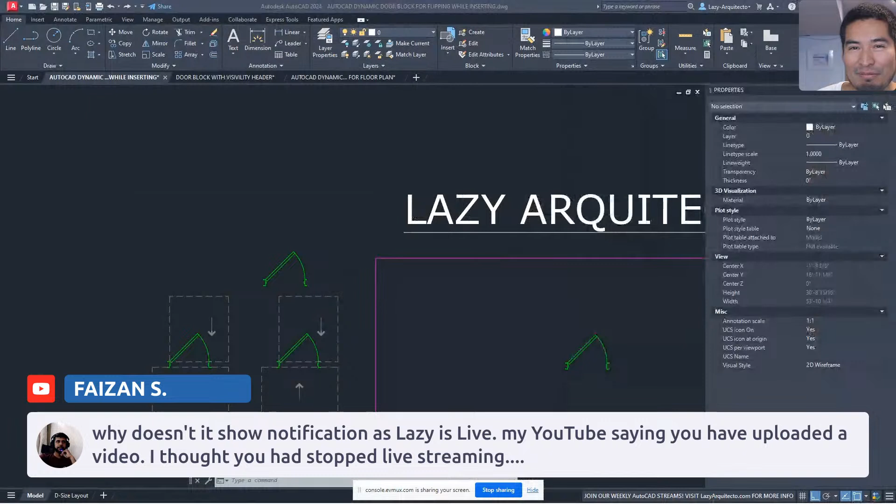This is in Spanish, that's funny. For people who don't know, Spanish is my first language, because I'm originally from Peru in South America. So yeah, so let's see.

All right, so I'm here with another account again, just to show you guys. I'm gonna unsubscribe, let's see. I'm subscribed already, I'm gonna unsubscribe just to show you. All right, so if you guys are new to the live streams, you can subscribe to the channel right here. What happens is, if you only do that, I can see that I'm subscribed now, but that doesn't mean YouTube is going to notify you when there is new content. There's an extra step, and the extra step is to hit this triangle over here, and you can click all. Right now you can see it says personalized. So if I click all, then this is where you will be 100% sure that you will get notified when we release a new video, when we do a new live stream, and so on. All right, so hopefully that helped you, Faizan, and also some of you guys who are new and are not receiving notifications.

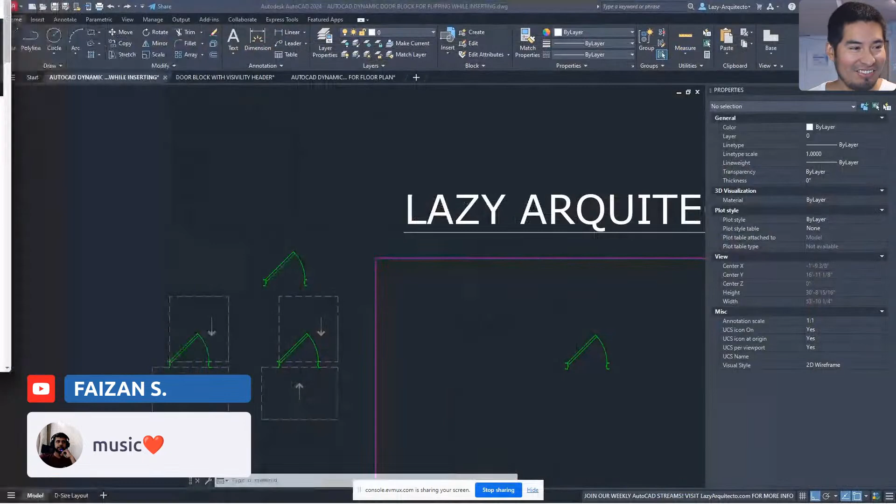So let's see over here, we have 'music heart.' Oh, so you're referring to the music, Faizan. Yeah, so there are many people that love the music, that's great, I like the music too. It's kind of a music from my country, Peru, so those beeps and sounds are from Peru.

Let's see, Pakistan, wow that's far away from here my friend. That's great that there are people joining from all over the world. I know Rachel is from England, Faizan now is Pakistan, I'm in the US, and I know other folks from other countries too. Oh sorry, Rachel said, 'What? Scotland, if you don't mind.' Sorry, I was getting confused with Martin. Martin is also on the chat, right? Martin, you're from England, right? Just let us know in the comments, confirm that for us. So we have England, Scotland, Pakistan, I know we have folks from India, from all over the world. Tuan says Vietnam, whoa that's crazy, that's great Tuan that you're watching us from Vietnam. What time is it over there?

Martin says yes, England, London area. Wow, that's great, Martin.

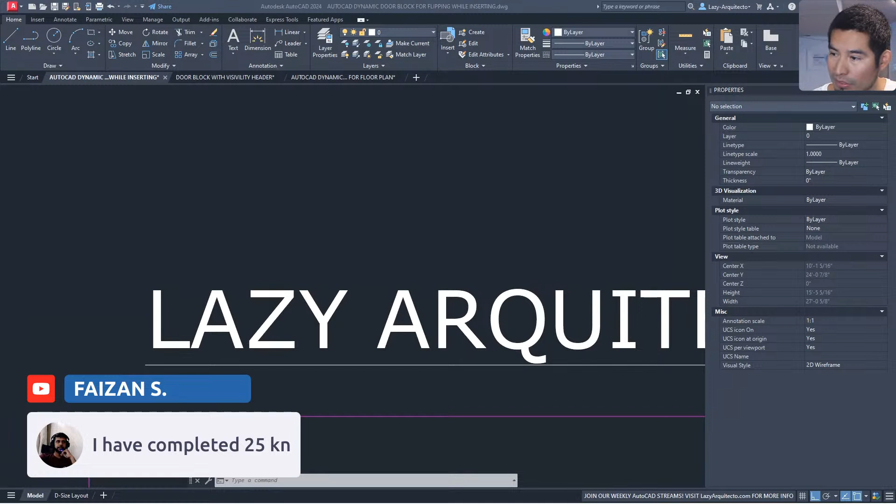Faizan says, I have completed 25 kn. What's that? What do you mean kn, Faizan? I have completed orders by learning from you. Oh, I have completed 25 online orders by learning from your videos. Wow Faizan, that's great. For people who don't know, our friend Faizan, I believe, is providing services online, and he says he's got 25 online orders already.

That's awesome Faizan, that this channel is kind of helping you, maybe motivating you to do all kinds of stuff. I know people already wrote me or emailed me saying they got their AutoCAD certification thanks to the channel. I also know other folks who got a job and said thank you, I learned so much from your channel, I got the job. That's awesome guys, I like to hear those stories always.

Rachel says, nice one Faizan. Thanks, you are helping a lot. I'm glad Faizan. I think you are focusing, from what you told me your story, just to put into context for folks live with us right now, I think you're focusing on dynamic blocks for your services online. Faizan says that's great, how you get set up.

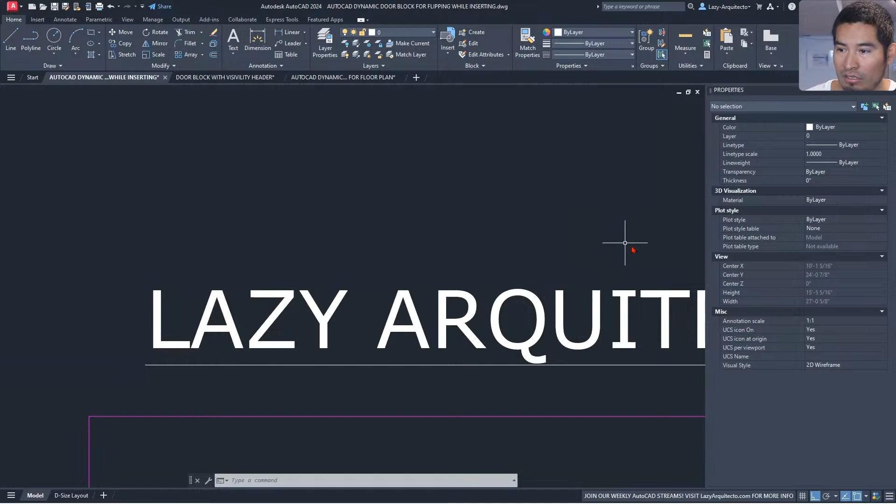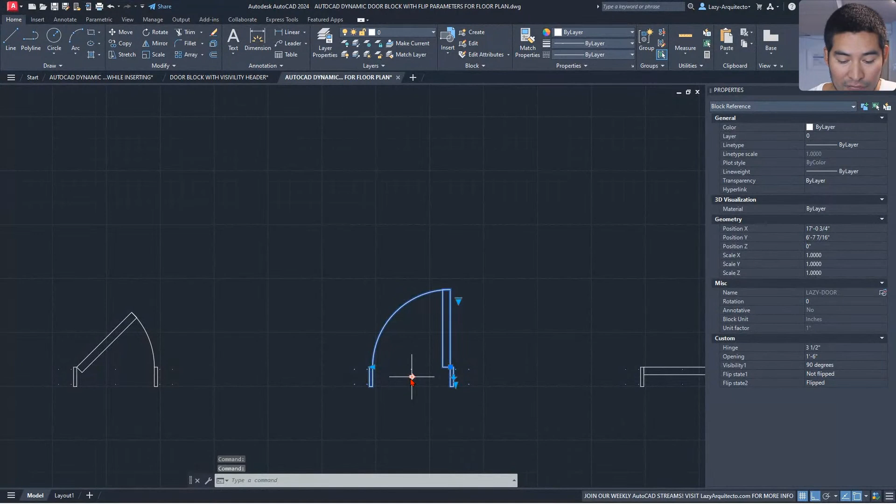Okay, so far we have created many door dynamic blocks in our channel, like this one over here that can flip like so, and can also stretch and have many visibilities. We also have created this other dynamic block that has a wipeout and can quickly change to a door header visibility to quickly generate ceiling plans, instead of trying to draw our headers one by one. We also have created this other dynamic block that will help us insert our block while flipping it on the fly. So we have created so many dynamic blocks for doors.

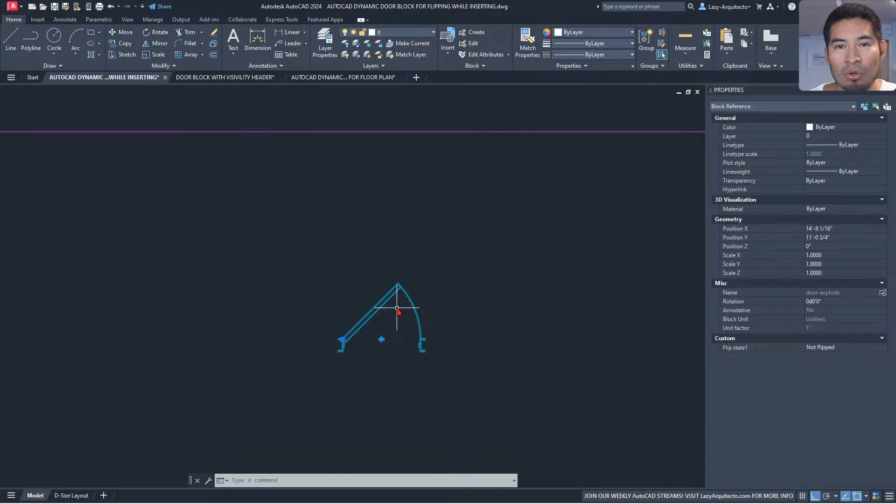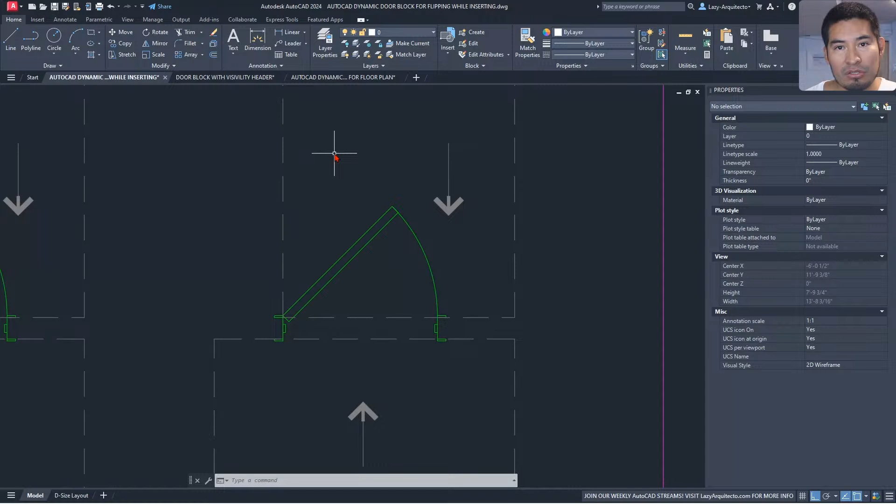However, today we're gonna improve this door dynamic block in a way that we're gonna add a clearance dynamic function. Most of the time when we work in the profession, we have to create handicap clearances based on the code of the city or whatever. So we're gonna do that today. Let's see how we're gonna implement that technique. We have the same door right there, but we're gonna implement this new technique.

So let me clean some of these things a little bit because I don't want you to get confused. These are just polylines with an arrow, nothing fancy there, but I'm gonna simply copy this right here and simply erase the rest. All right, so I don't want you to get confused.

We have some comments on the chat. Let's see.

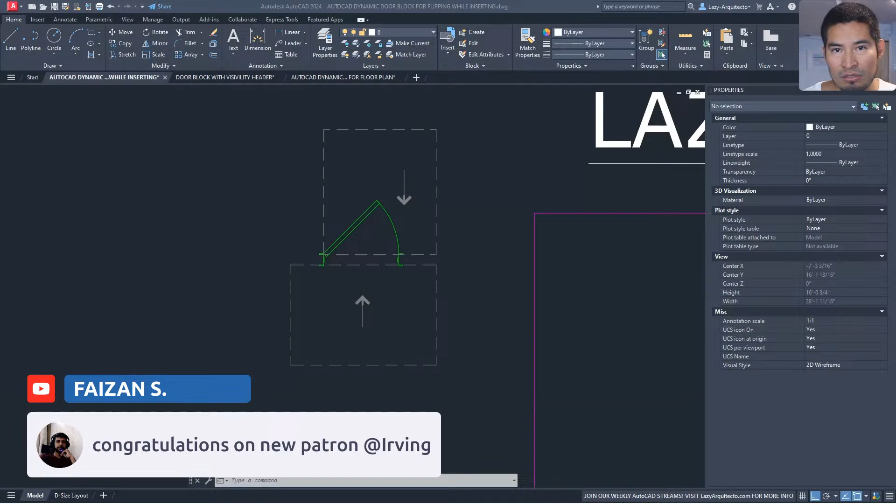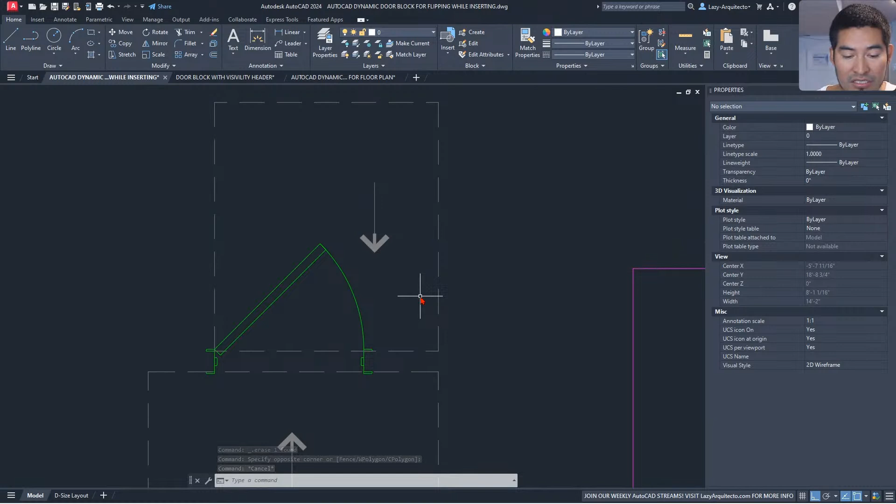Okay, guys, so let's see how we're gonna be able to do this. Hopefully we can do this together. So again, nothing fancy right here. We have simply a polyline with an arrow, and let's see how we can implement this dynamic clearance to our dynamic door. So the way I'm gonna do it is I'm gonna first select our arrows right here, or our geometry,

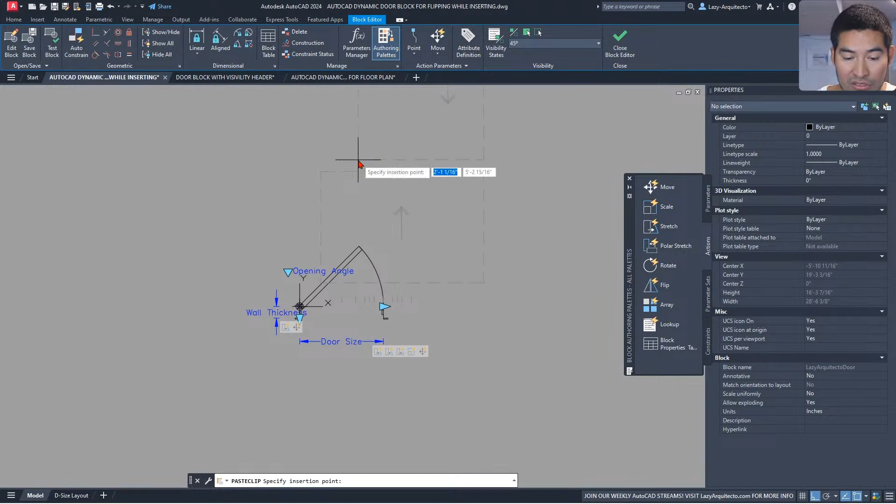and I'm gonna simply use Control Shift X on my keyboard. That's a shortcut to cut base, right? And I'm gonna cut it from my base point right here. So I'm gonna click, and then I can go to the block editor by right clicking on it. And now I'm inside the block editor environment. I'm gonna simply use the Control V shortcut and place it exactly on the base point, like so.

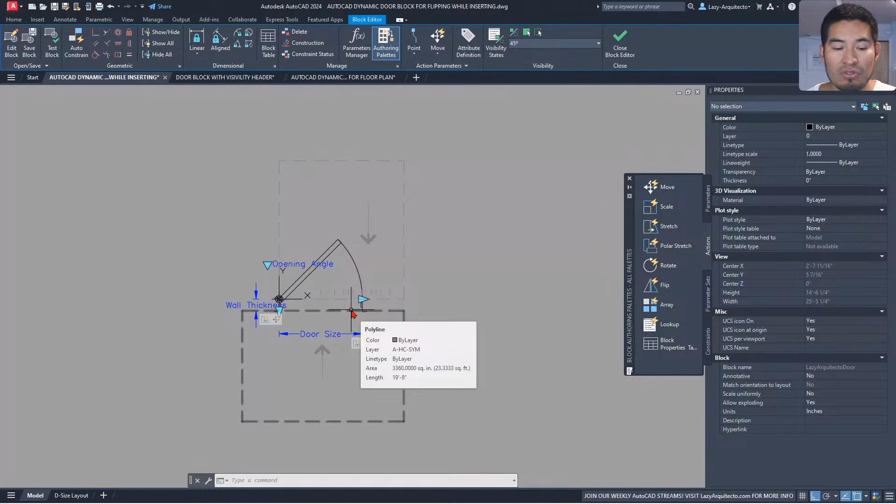Again, all of these different dynamic doors, we already created them in the channel, right? So we don't have to waste time again showing you how to create these doors. But we want to improve this. We want to keep making our lives easier, guys. And let's see how we can do this.

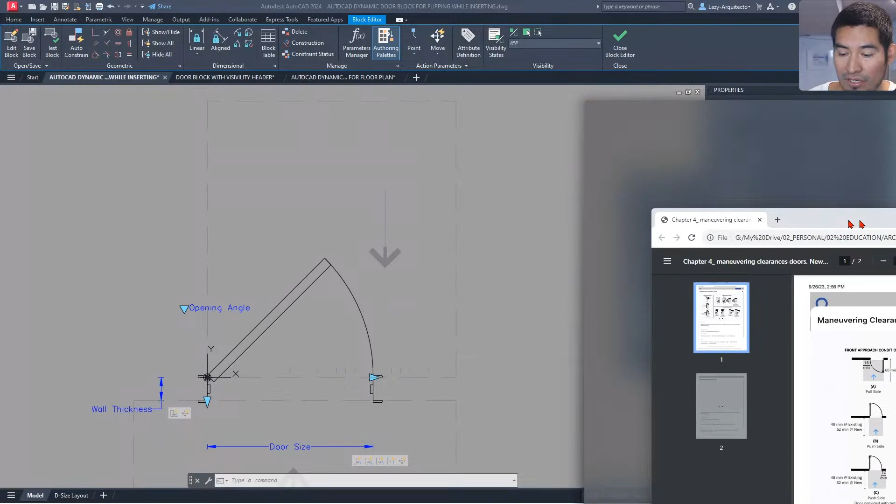So in order to be able to generate our clearances with the right dimensions, I already got a PDF right here that I'm going to show you. It's basically some dimensions for our clearances. People who work in architecture might already be familiar with this, but if you don't work in the architecture field, that's not a problem. This technique can be implemented for many different purposes.

So you might be an electrician. If you learn this technique, it's gonna save you so much time. You might be a civil engineer. Doesn't matter, as long as you learn the concept of this technique with dynamic blocks, you're gonna be able to implement it in whatever block that you have. But for this example, I'm gonna use accessible clearances for doors, because I'm in the architecture field.

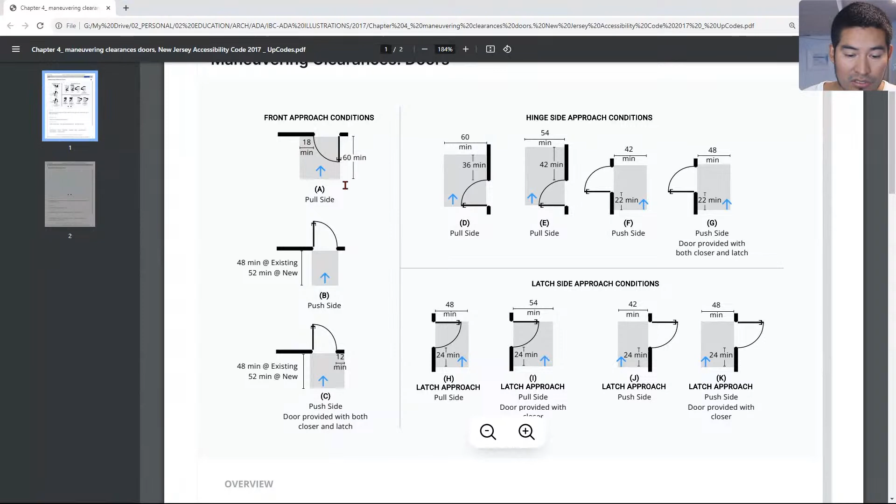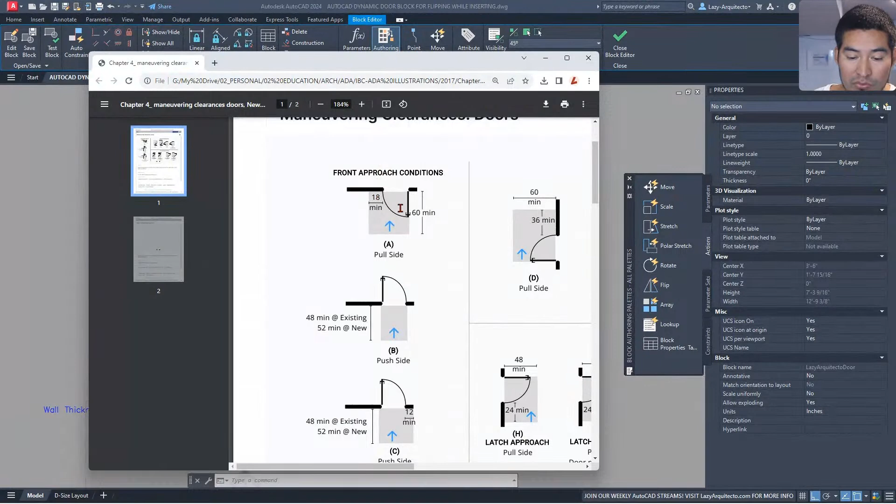Okay, so this chart is gonna help us for the dimensions. Let me put it on the side, and let's keep moving. I'm gonna focus on this top area first. What we have right here is the front approach condition, and that's 60 inches on this side and 18 inches on the pull side over here. So just remember those two numbers because that's what we're gonna use.

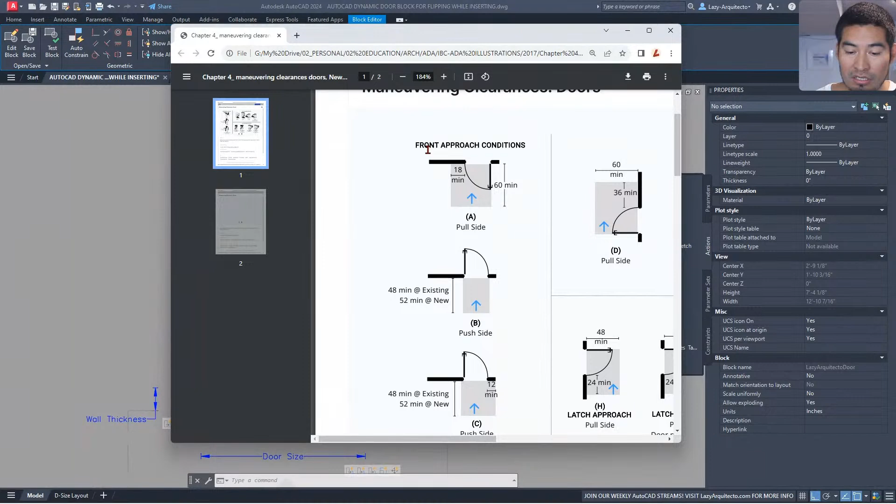We already have 60, but I'm just gonna make sure really quick. So here we go, 60 inches or 5 feet, and on this other side we should have 18 inches, and that's what we have. So far we're good. The arrow is very important also. That's the direction of how people are accessing this door. Let's double check. It's going towards the front approach, so our arrow is pointing to our door.

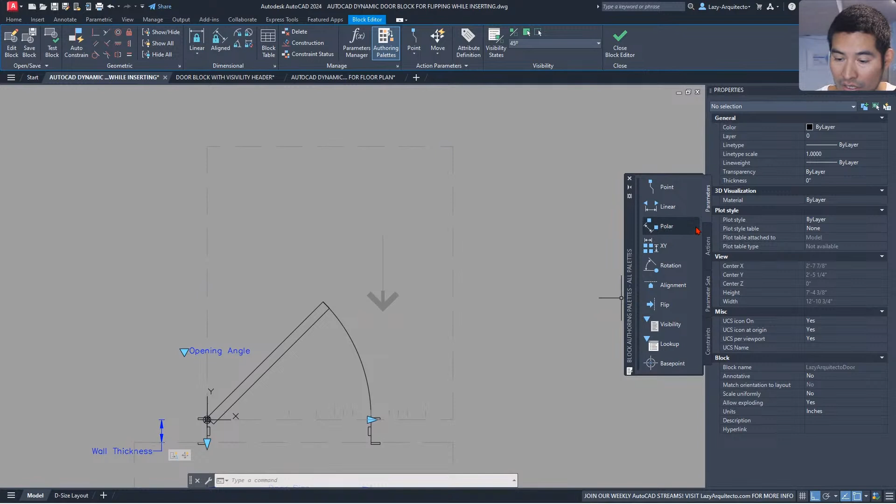Great. So one of the first steps is to start adding some parameters and actions to make this block more helpful. The first that I'm going to add is the linear parameter. I'm going to add it following the instructions on the command line, click right here on this base point, oops, right there. My second point would be right about here, and finally like so.

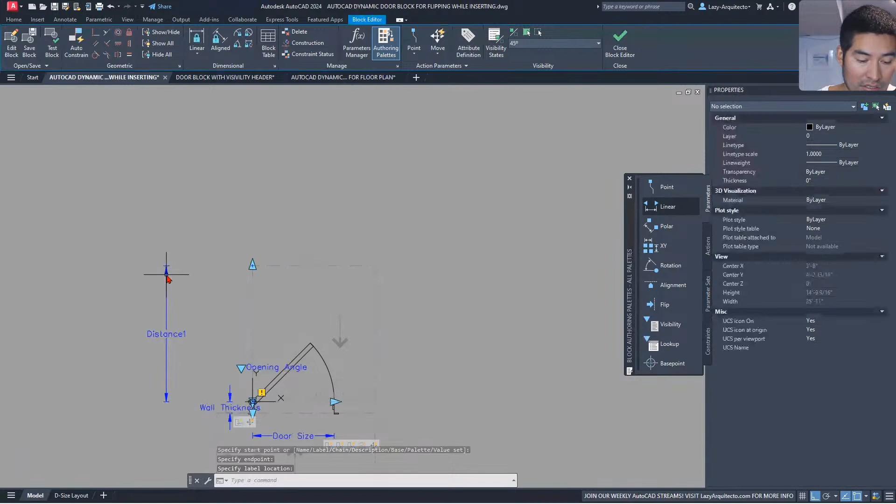First of all, I'm gonna name this correctly, because if we don't, we're gonna start getting confused once we add more parameters, more actions, more information. So I'm gonna go to my properties palette and simply rename this to something like pull depth. That's all up to you, but that's how I'm gonna call it: pull depth.

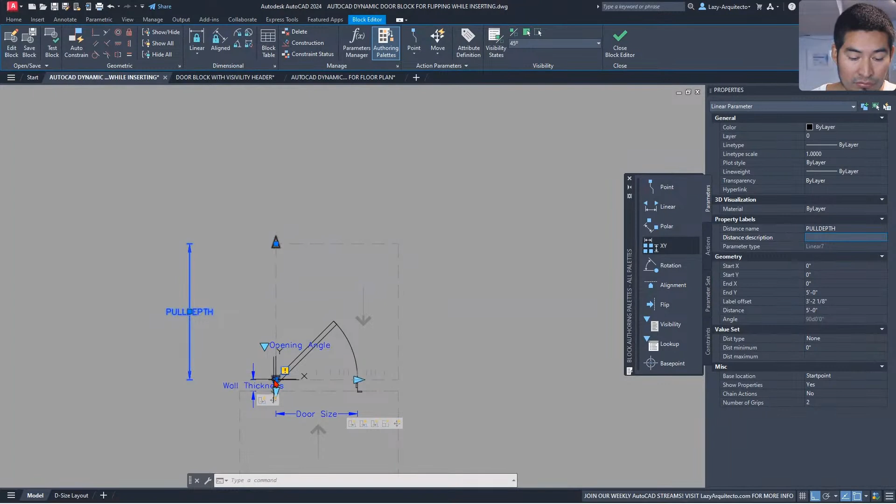Now, we're not gonna need any of these grips that we're seeing. We have two so far, one here and another one over here.

I'm gonna simply go ahead and say 0 right here for the number of grips on my properties, and now we have an exclamation mark. This exclamation mark, for people who are familiar with dynamic blocks, simply means that there is something missing for this parameter to work correctly. And the thing that is missing is an action.

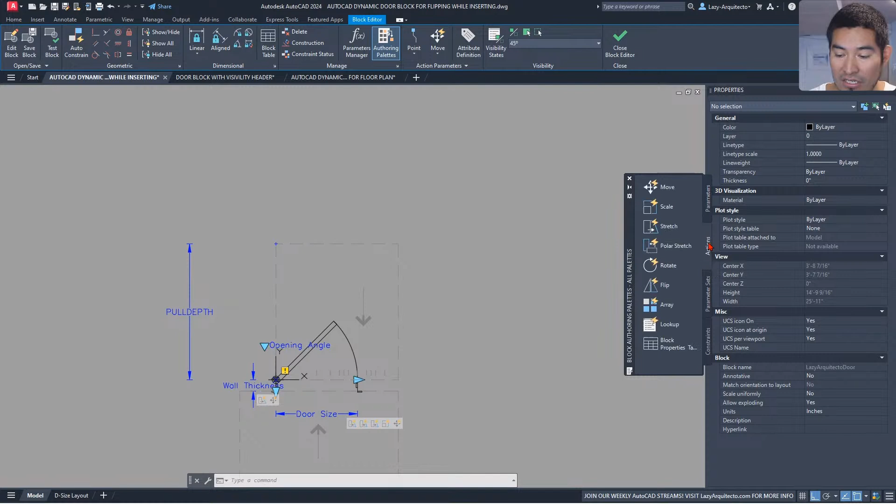So let's go ahead and add an action right here from the authoring palette. If you're not seeing it, it's also in your ribbon authoring palette. So let's add the action stretch, because we want this clearance rectangle or box to quickly increase or decrease in size, right? So we're gonna use the stretch again. The stretch action instructions say select parameter. So let's select the parameter that we just added.

Now we need to specify a parameter point, and I want it to be right here, this one, like so. Now it is asking for a corner of the stretch, and it would be this corner like so, and the objects would be all of these, of course. All right, I'm gonna press enter, and here we go. We got rid of the yellow exclamation mark, so that means this parameter is ready.

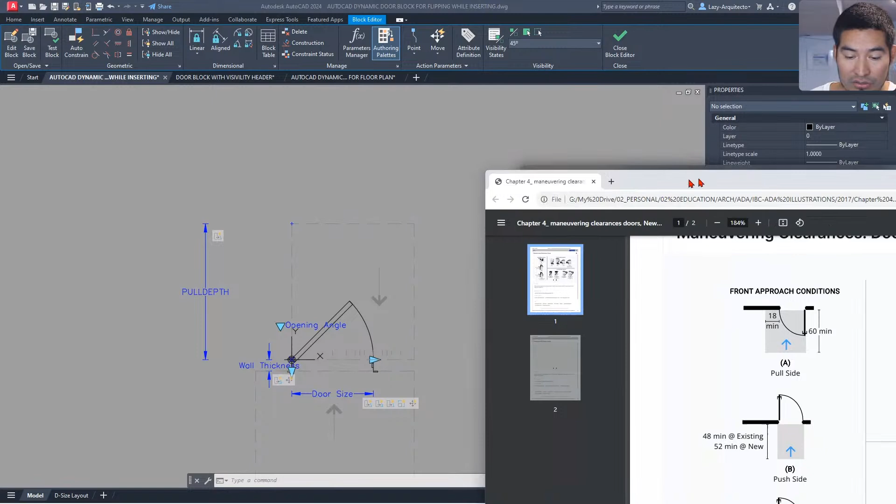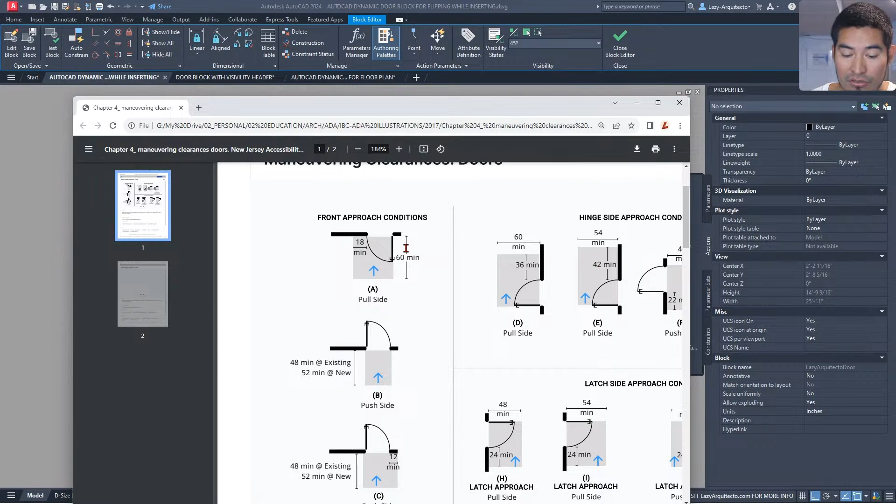Now let's go back to our PDF illustration just to make sure how we are doing. All right, so we have this side over here. Now we also see that what's gonna change is this pull side, the 60 inches. You can see we might have 36 inches in another condition, and so on. Over here, we might have 42 inches also. So let's see how we're gonna do that, guys.

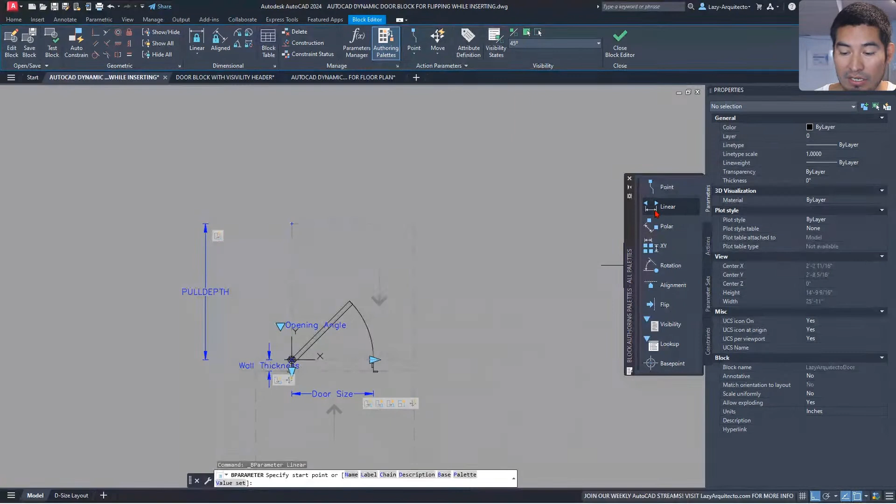Okay, so in order to make this dynamic clearance work, let's add another parameter, in this case the linear parameter again, right? And the way we're gonna add this is by selecting right here on the block, and then all the way right here, and let's move it up like so. That's to play with the pull width of the clearance.

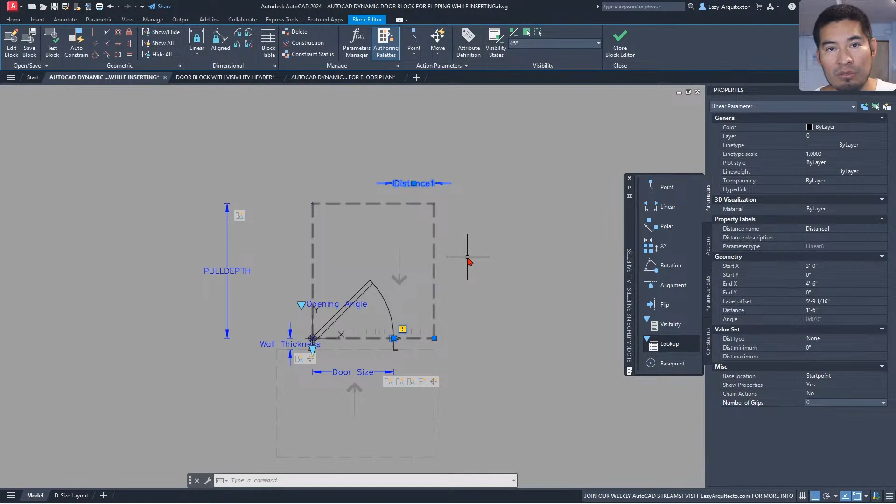So I'm gonna simply select that and apply the same steps that we previously did for the pull depth. What we did, guys, was simply change the number of grips to 0, because we don't want to control this clearance with the grips. We want to be able to control this with a table, which is quicker, easier and more efficient. And we're gonna see that in a moment.

So let's rename it. That's the second step that we did. So let's go over here and say something like pull width, right? That's all up to you. Again, this is a way to not get confused later on. All right, again, there's an exclamation mark. Let's add an action, and the action is gonna be the stretch action.

Let's select our parameter. Let's select now our starting point. I want it to be right about here, and then it says specify the corner of the stretch. I want it to be right about here, like so. And my objects to be stretched, I want them to be all of these objects like so, and of course press enter.

All right, so we did the same steps. I think there were 3 steps to add the pull depth and the pull width. Nothing different, right? We simply repeated the steps. So let's see what's next now. How can we control these parameters, right? How can we do that? The way we're gonna do it is adding a table again, but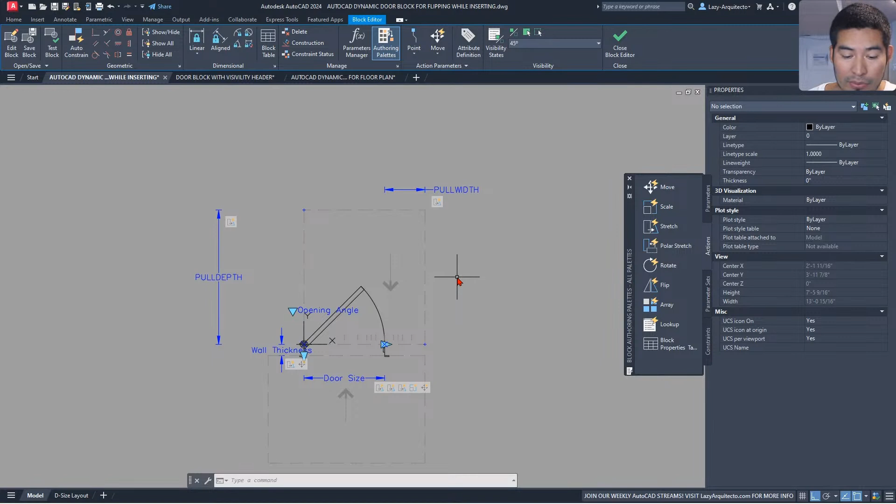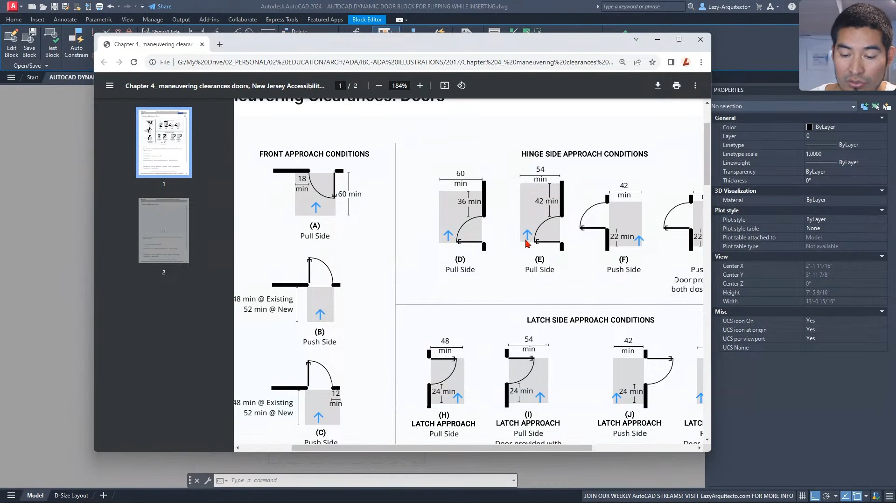before we add the table, if we go right here on our PDF illustration, we can also see that not only the width and length of our clearance will change, but also the arrow. If you can see right here, this arrow is pointing towards the door, but in this other condition on the pull side it's changing directions. This one is the same. So we need to also add another parameter and action to handle this situation for the arrow. So let's see how we can do that, guys.

All right. So that's the arrow right here. Again, we need a way to rotate this arrow, right? And the way we're going to do it is, first, it's always a parameter. Most of the time, 99% of the time, we're going to start with a parameter. And if we go right here, there is a rotation parameter that we can use.

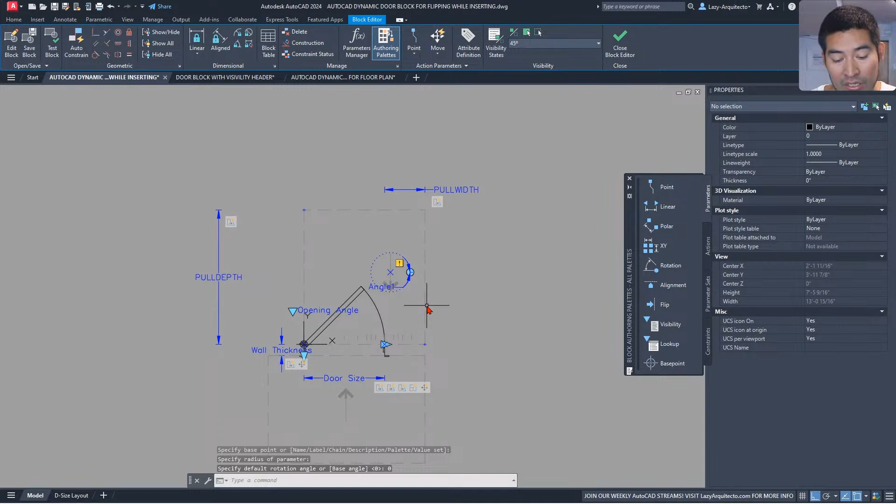Following the instructions, I can select my base point right here in the middle of the arrow, and then again specify radius. I'm going to simply click around here, and I'm going to press 0 for the angle. All right, so the same thing, there is an exclamation mark, so that means that we can go and add an action. And there is here another rotate action that we can utilize. So let's do that, and let's select our parameter. In this case, this rotation parameter.

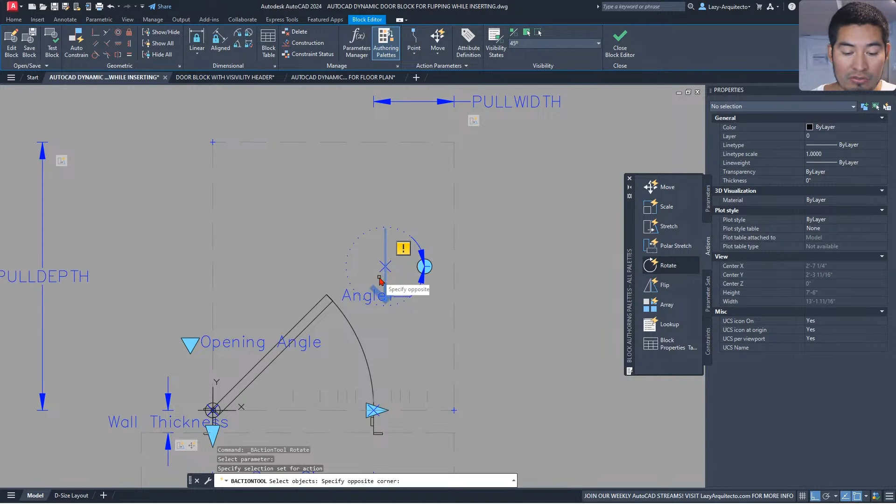Let's select the objects. The objects, of course, would be our arrow, right? And let's press enter. Here we go, guys. We added a rotation to this arrow right here. And now what we can start doing is we can start implementing a table. Nothing too complex. What we did so far, we added a linear parameter and a stretch action. Over here, the same steps, and then a rotation.

Now, how can we control all of these three parameters and actions in one single location or in one single way? The way we're gonna do it, guys, is adding a parameter again, and the parameter that I'd like to introduce you to is this one called lookup. So let's use the lookup parameter, and following the instructions on the command line, it says specify parameter location. So nothing different, right? It's the same instructions that we previously had when we added the linear parameter and the rotation parameter. Now here we're using the lookup parameter, but the instructions are very, very similar. So you shouldn't be afraid to start utilizing all of these parameters.

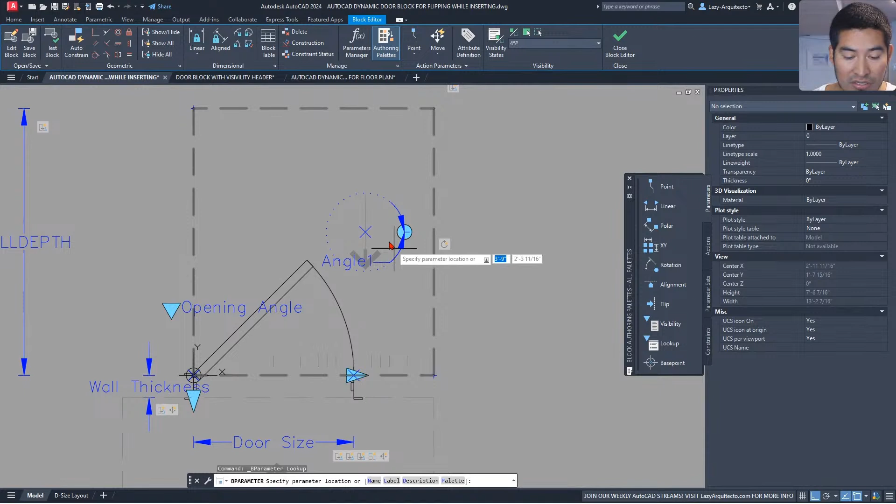So I'm gonna specify my location. So again, doesn't matter. I'm gonna place it very close to my arrow, right in the middle, like so. All right. So now the same problem, guys. We have an exclamation mark, and we know that's not something good. So let's go to the actions and add a lookup right here. There is also a lookup action. So let's add that lookup action like so.

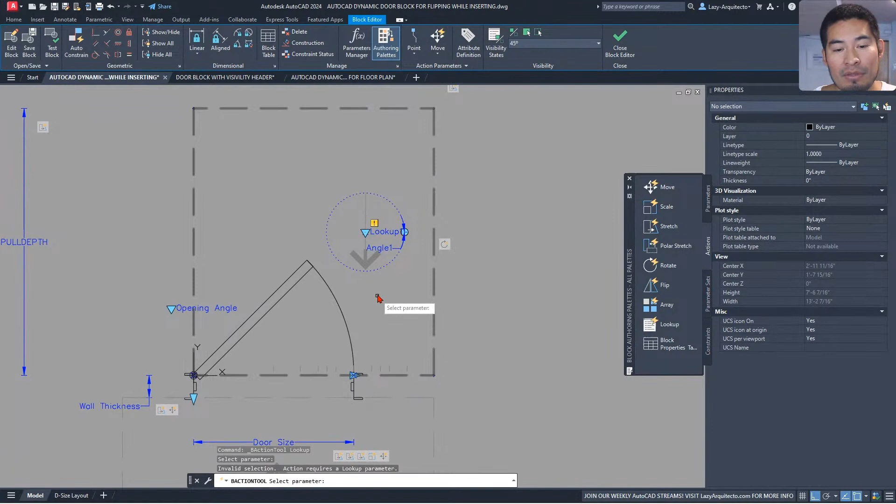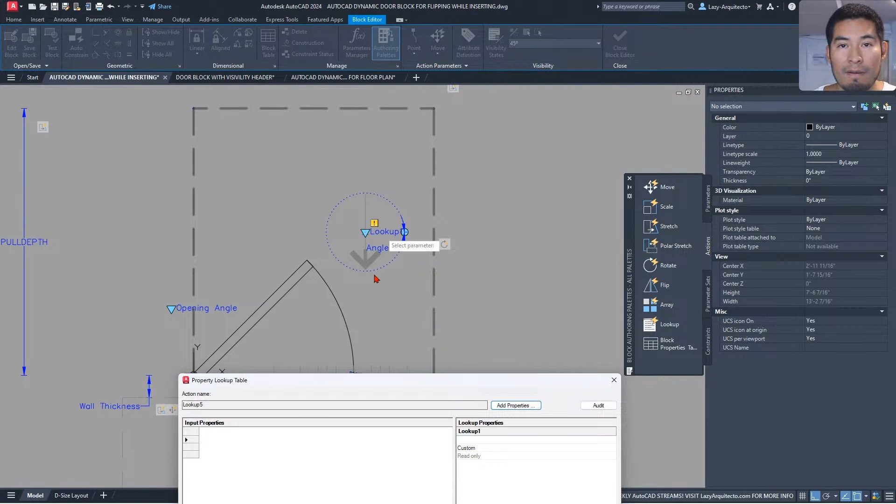And let me go ahead and now, following the instructions, select the parameter. So I'm gonna simply select this parameter like so, and then sorry, I was selecting the rotation parameter, guys, so be careful with that. What we need to select is the lookup parameter. So it's right here. Let's select that, and boom, immediately we have a nice table right here that we can quickly customize in order to control all of these three different parameters: the pull depth, the pull width, and then the rotation for our arrow. So let's see how we can do that.

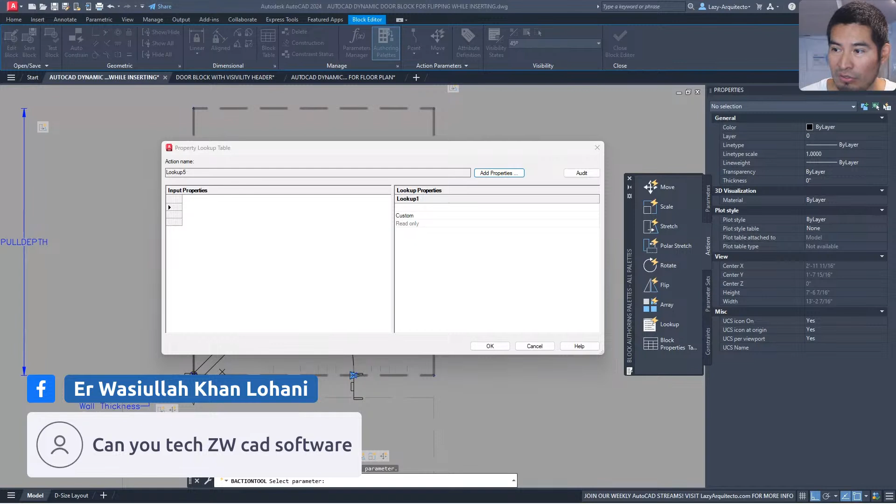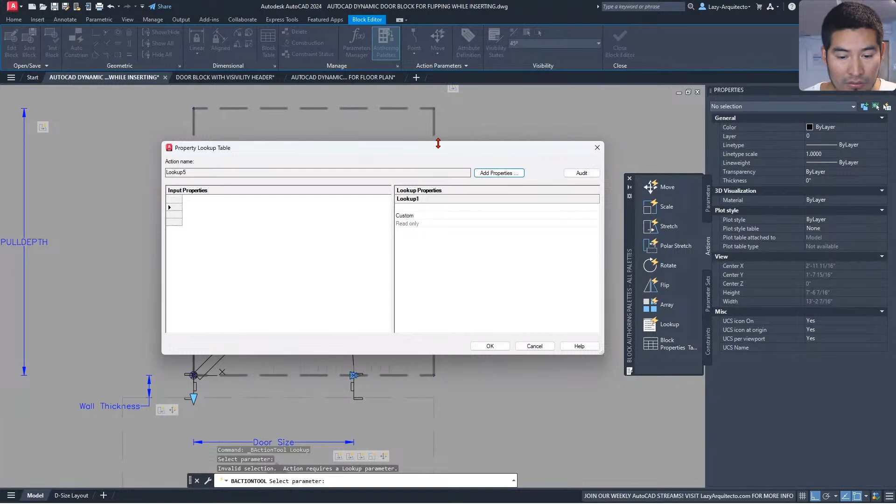All right, so let's see over here. Okay, so the next step is adding properties, and I'm gonna simply click right here on the add property option. Now we have many different properties just because I was testing all of these parameters and blocks before, but you're gonna have only the ones that we just created. The one that we created was the pull depth, remember, right here. So let's try to find that. It's right here, pull depth. So let's simply add that like so, and you can see that the pull depth was added. Now let's add the next parameters.

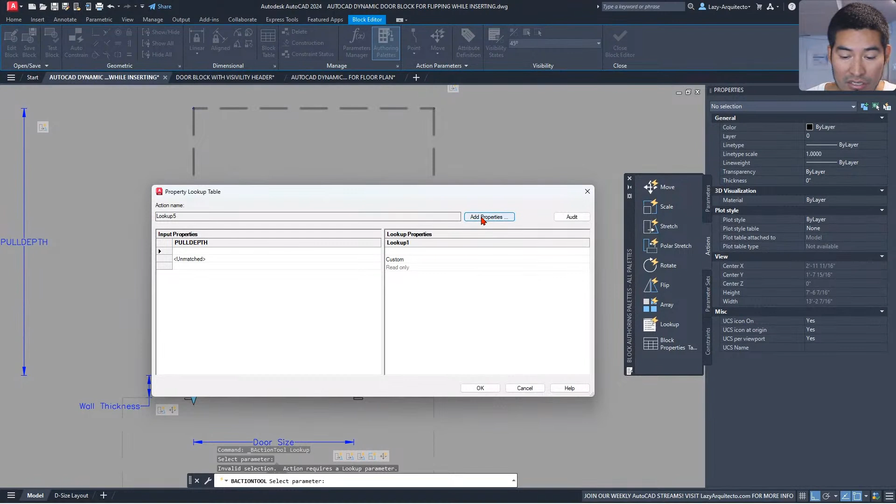Let's go here and add the parameter, and this would be the pull width, right? The one that we created right here. So let's click that and add. So we are adding again these parameter properties to our lookup table, and the last one that we created, guys, was for the rotation, right?

I don't remember if we named that one. Yes, we didn't name it, guys. So I'm gonna stop right here then, and simply click OK. Because we didn't name our rotation angle, so it says angle 1. So the way that I'm going to name it is, again, selecting the parameter, the rotation, and instead of angle 1, I can say something such as maybe rotation or arrow rotation, right? That's all up to you. This is a way to simply not get confused, right? So let's try again, guys.

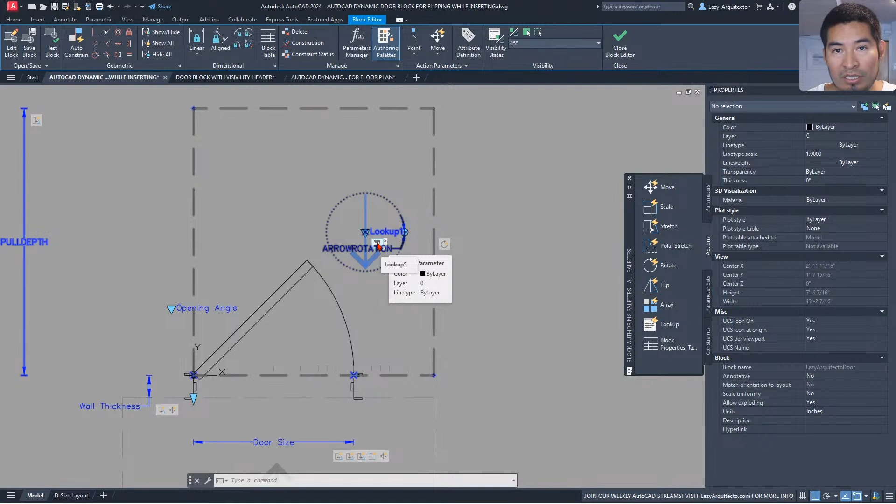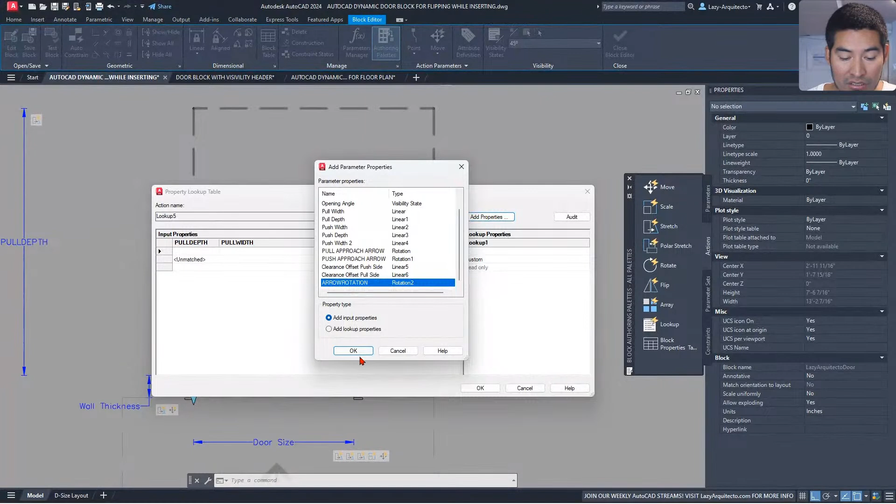Now we have the lookup parameter right here, and since we kind of stopped using it, the way we can access it again is simply right clicking on it and say display lookup table. So here we go. That's the table that we were working on, and let's add the last parameter, which was the arrow rotation right here, guys. So I'm gonna click OK, and here we go.

So what I like to do here is, you can of course move this as you wish for the location and change as you need it, right? I like to have the pull width first and then the pull depth. That's all up to you, but I want you to know that you can click and drag it and rearrange it as you need.

Now let's start adding some information right here, and the first that I'm gonna add is for this option right here, the front approach condition. All right, so because that's the arrow that we have pointing to our door, we need 60 inches for our depth, and we need 18 inches for the width. So let's go and add those numbers. Pull width 18 inches, press enter, pull depth 60 inches and press enter.

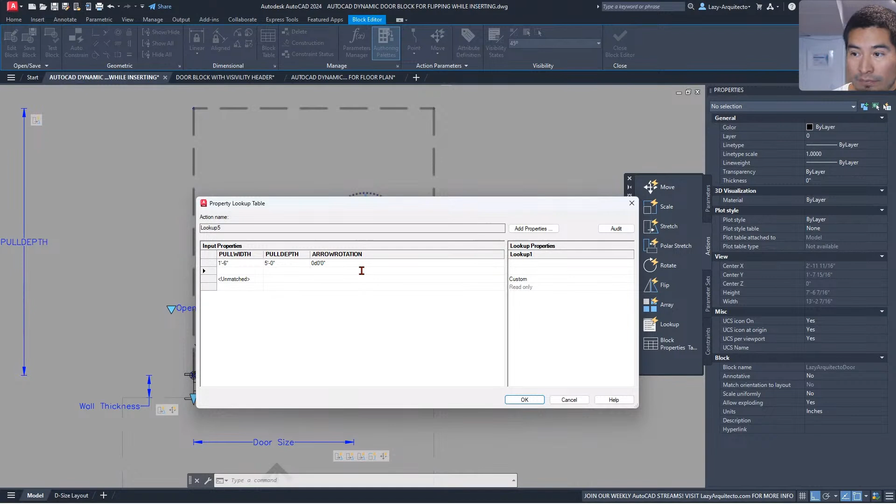Now for the arrow rotation, guys, right now we can see that our arrow is showing correctly, pointing towards our door. So then that means the rotation would be 0, right? Because we don't want to change that rotation. Okay, so let's see now how we can add the next configuration.

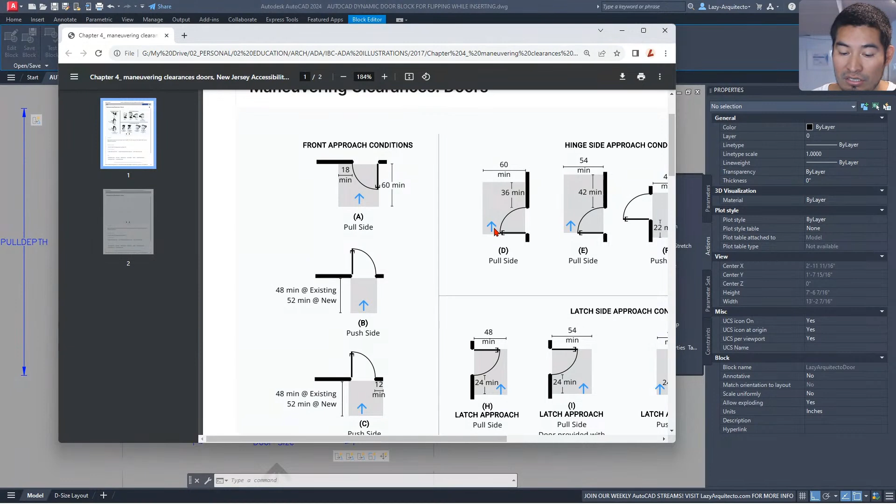Let's go back to our PDF right here, and the next configuration, I wanted to do it for this condition right here. So it's again 60 inches over here, but on the pull side is 36 inches instead of 18. And also we can see that the arrow orientation changed. So let's do this condition, guys. So let's go over here. Again, 36, press enter. The pull depth would be the same, 60 inches, right?

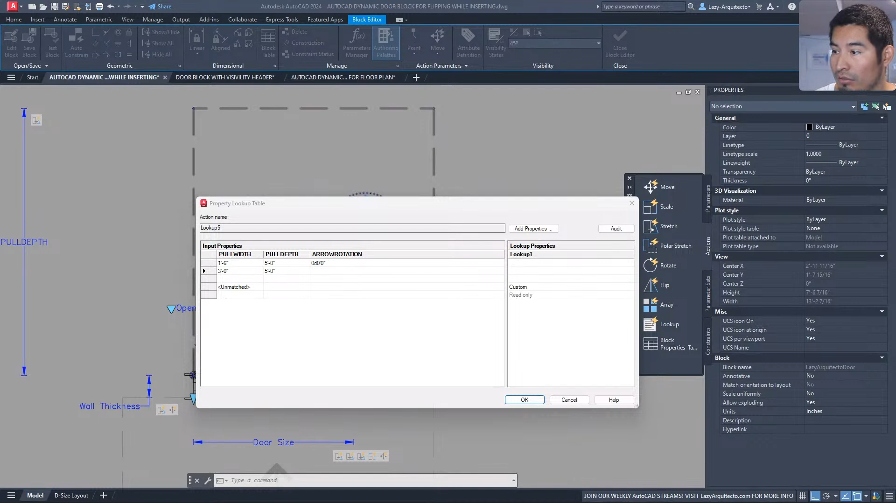And the rotation will change, guys. So for the rotation angle, right now, again, it's showing down, but we wanted to rotate it according to our illustration in this direction. So I'm going to rotate it 90 degrees and press enter. And let's do one more condition, guys. These are again the same steps, but I want to give you a complete enough example so you can finish the rest of the other conditions, right?

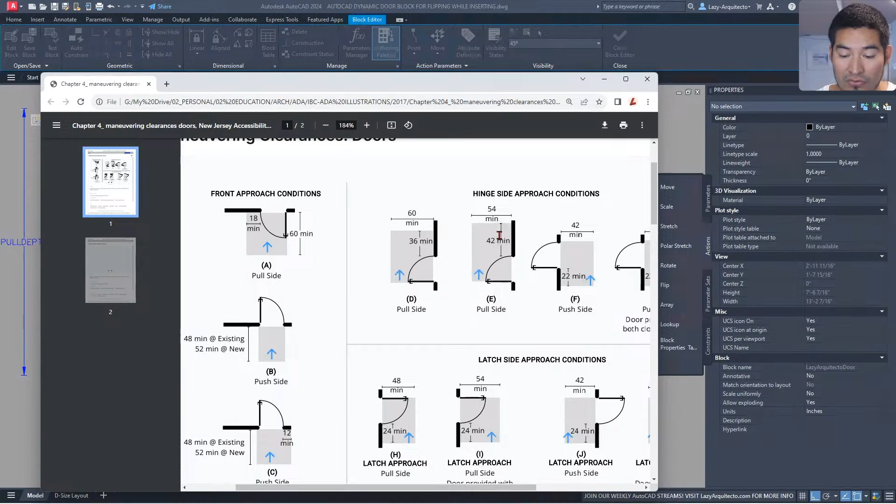Let's do one more condition, which is this one, the pull side. So the only difference, the arrows are going to be the same as this. The pull side is going to have 42 inches, so that's changed, and this would also change to 54, right? Remember those numbers. So let's go ahead and add the third condition. On the pull side, 42 inches. The pull depth would be 54 in this case, and the rotation would be the same as the previous one, so that's 90.

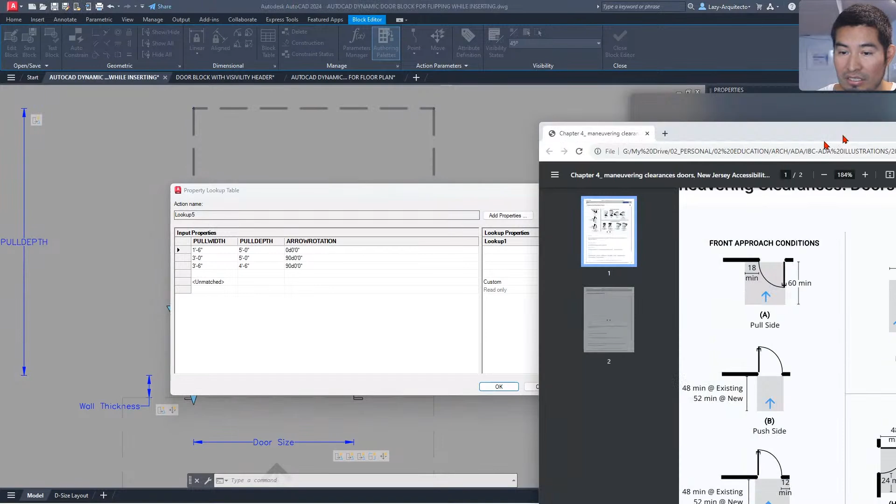Now, the final step here, guys, is how are we gonna be able to recognize which configuration we are utilizing, right? Well, that's why there is an option right here to add a name, and the name is gonna be simply the same as this illustration, right? This is the first name, that's the other name, and we have A and B conditions where it's very different. So let's do that really quick.

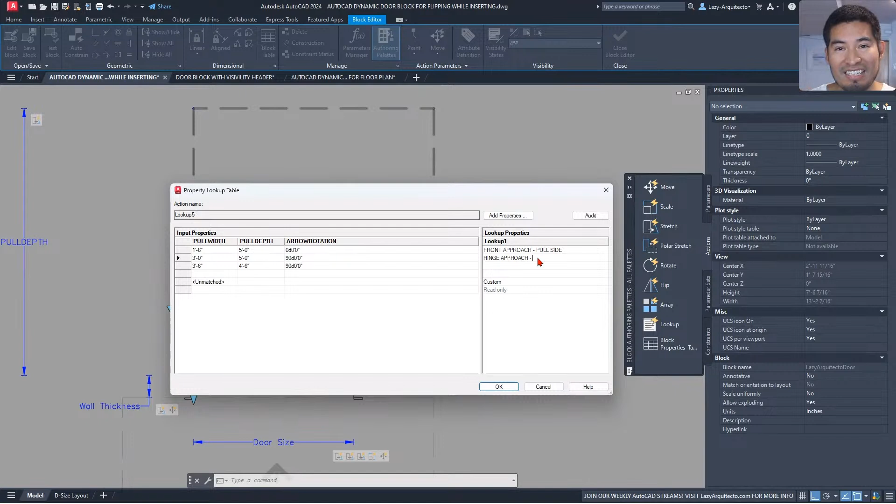So for the first one, let's call this front approach, right? Front approach, and this would be the pull side, guys. The next one would be the hinge approach, according to our chart. Nothing that we're reinventing here, guys, we're simply following the standard chart so people who utilize this block can quickly understand their condition. We don't want to dramatically change the name.

So let's see, this will be pull side, and this will be the A condition, because the other one is kind of the same. I can simply copy and paste it like so, but this would be the B condition, where instead of 36 we will have 42.

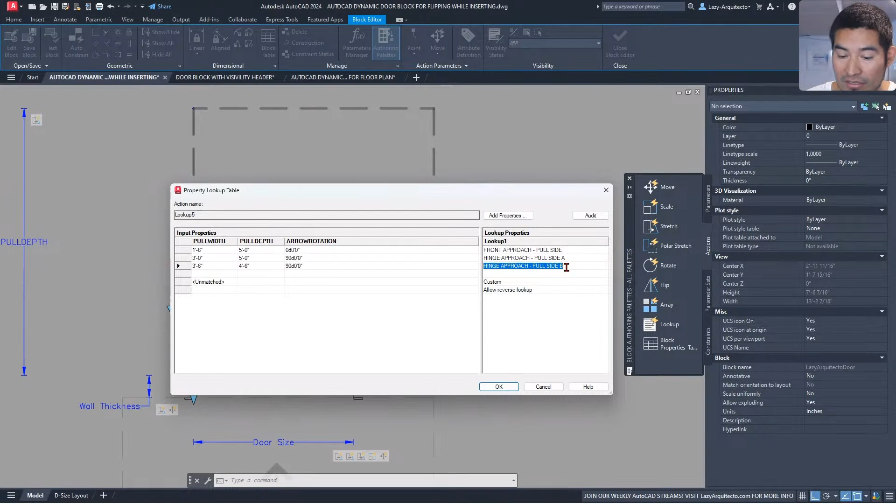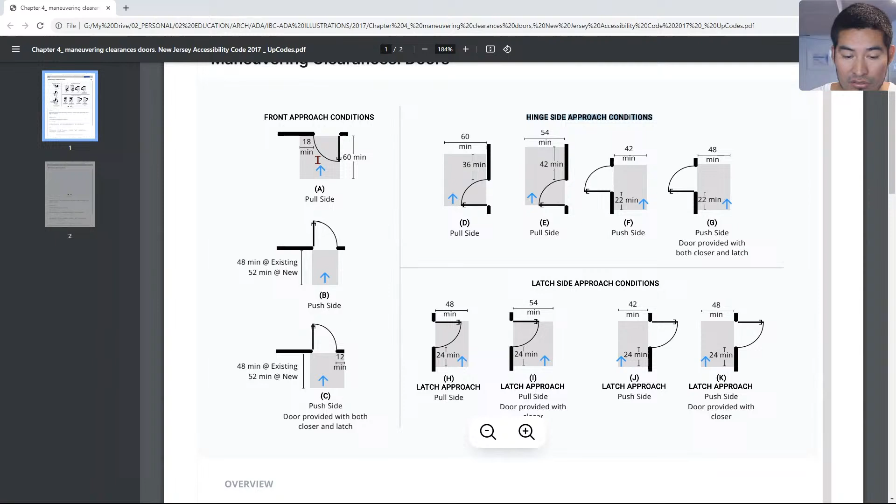All right, I gave you 3 examples. We have so many different conditions here, but with these 3 that we are doing, that's more than enough for you to follow along and finish this up. So let's test it so far. Let's click OK and let's see what we have. Go to the test block option.

So we will have a brand new visibility grip right here. Let's select that now and change to the approach pull side A, and boom, you can see immediately the changes. The clearance increased on this side, and my arrow also rotated. Then if we go to the next, which was the hinge approach pull side B, we'll see a change in the size over here, but our arrow is the same.

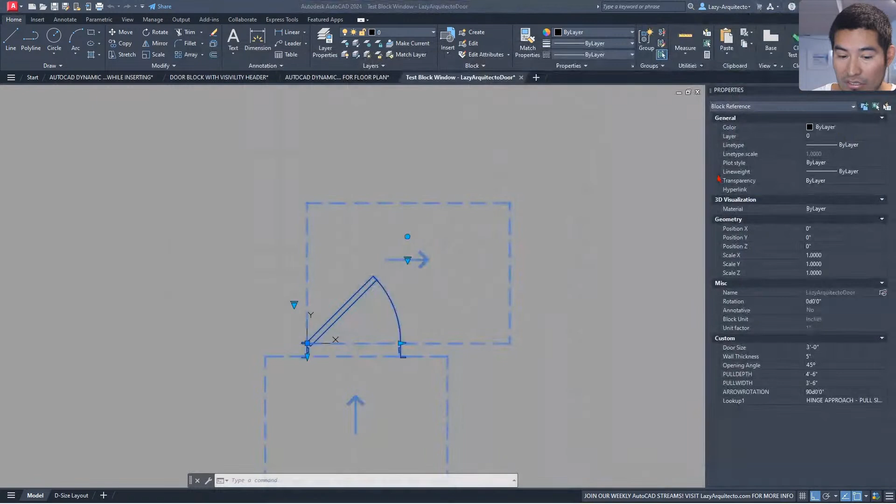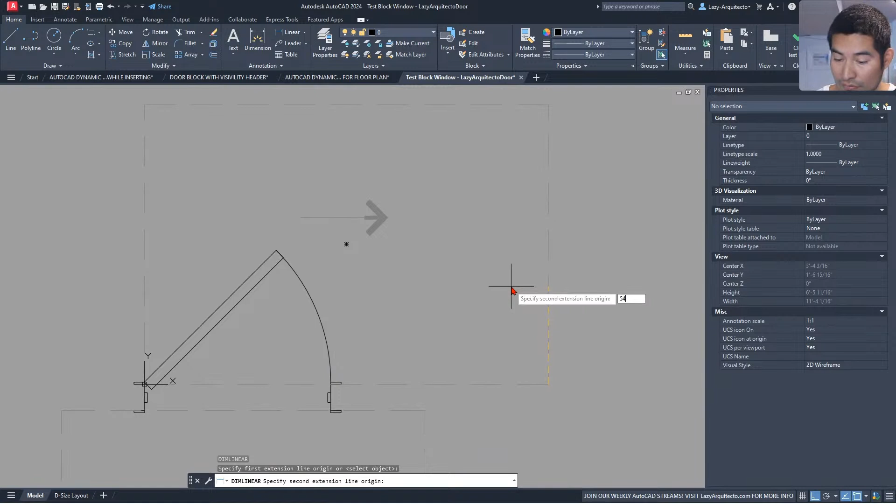So let's double check and make sure that's correct. The condition for these guys is hinge approach pull side B. Let's go right here, and just to make sure, this is condition B, 42 inches and 54. The arrow is in this direction, so let's double check. 42 inches, let's go right here and say 42, and here we go. That's great, 42, and we should have 54 inches on this side. So 54. Awesome guys, the arrow is pointing the correct direction also.

Now we still have an issue right here, guys, because we don't want to confuse the people using this block. We don't want to give them the option to manually rotate our arrow, it's gonna mess up our block and we don't want that. So I'm gonna change this to not show. The way I'll do it is close the block editor and go to our block, and once we select our rotation parameter, there's an option for the number of grips, and let's change that to 0.

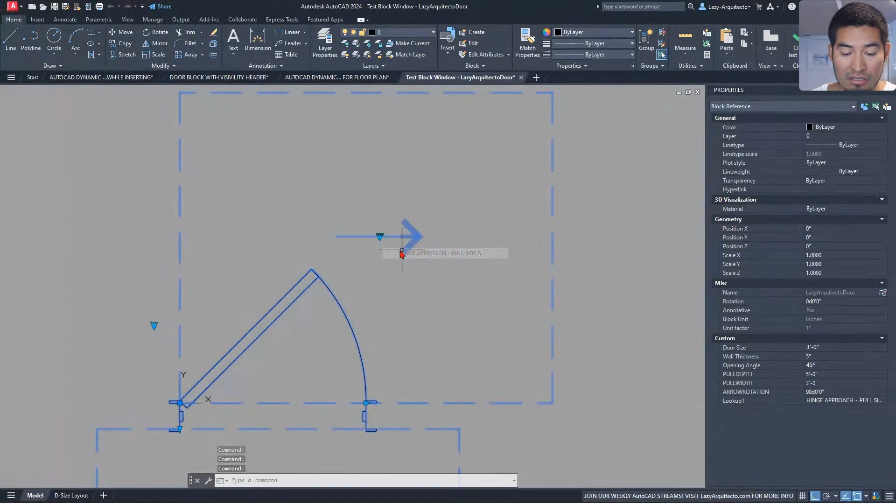It's kind of the same idea for all the parameters, guys. Remember, we changed the number of grips for this parameter also, same thing, so we hide it. Let's do a quick test, and now we cannot see that grip, which is great, right? So again, hinge side and hinge pull side B, and here we go. Now that we're good with it, let's close it.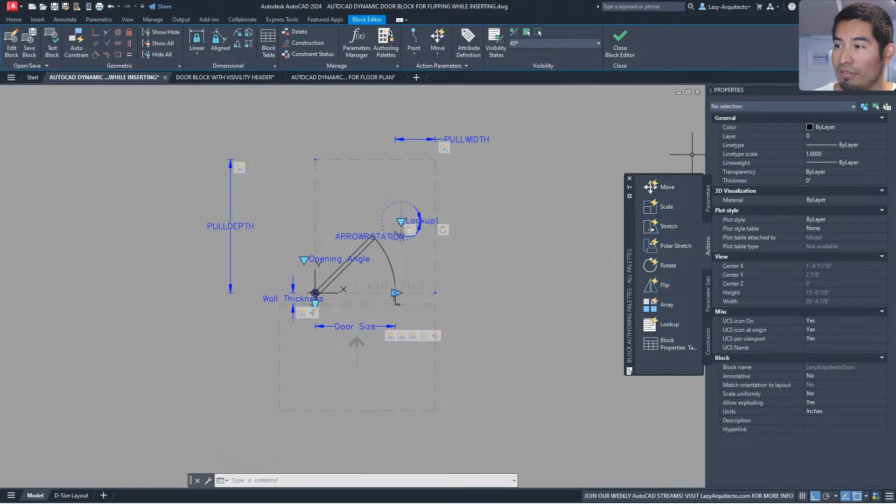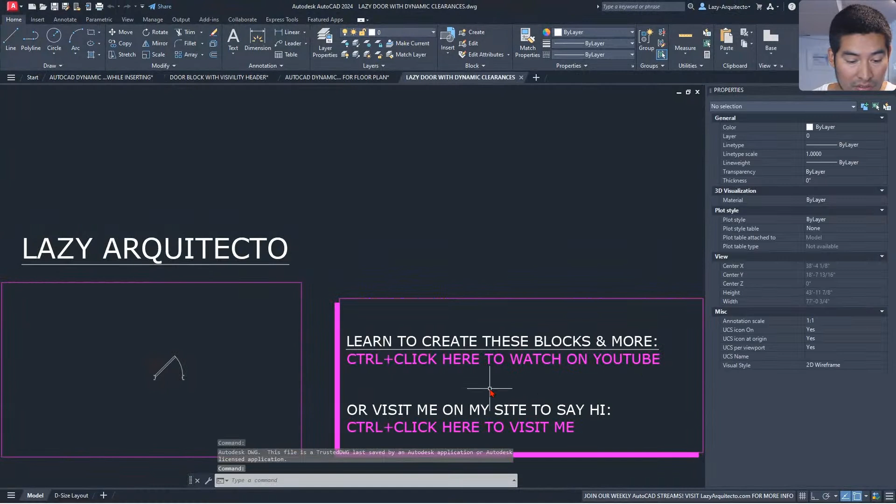You'll apply the same steps, nothing really different, to complete all of these other configurations, and the same for the bottom over here. So I'm gonna close that block and save the changes since we already have that block right here. Let me show you guys the final door right here. With all of the configurations for the clearances, this will be the final work. We have all of the different approaches for the push side, for the pull side, and so on.

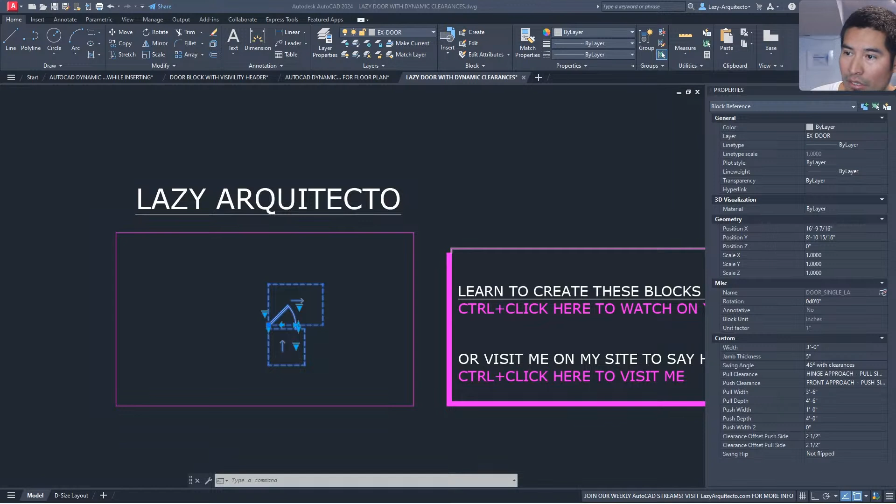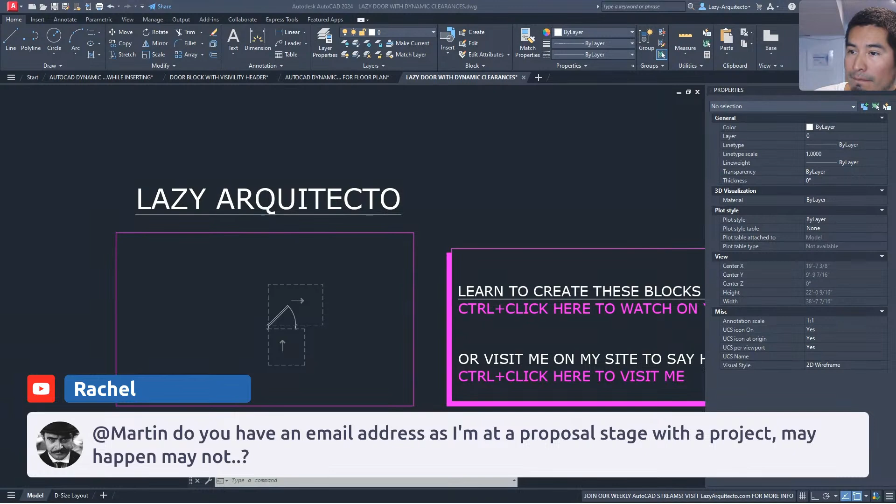Martin says maybe Irvin can send you my email address privately. Sure, I can do that, Martin, I believe. Yeah, sure.

What do you guys think about this dynamic block that we created today? We're gonna have a contest also with a simple question, just to see how well you know the Lazy Arquitecto. So it's a simple question to win this or any other dynamic block we have so far.

Rachel says, I've used lookups, but in civil engineering. Great, Rachel. So how have you used it? If you can give us an example, that would be great, so people can imagine how you're using it. Rachel says, I use it 100% in traffic symbols, as there are hundreds, but when I do dynamic blocks, what a battle, as they keep updating each other.

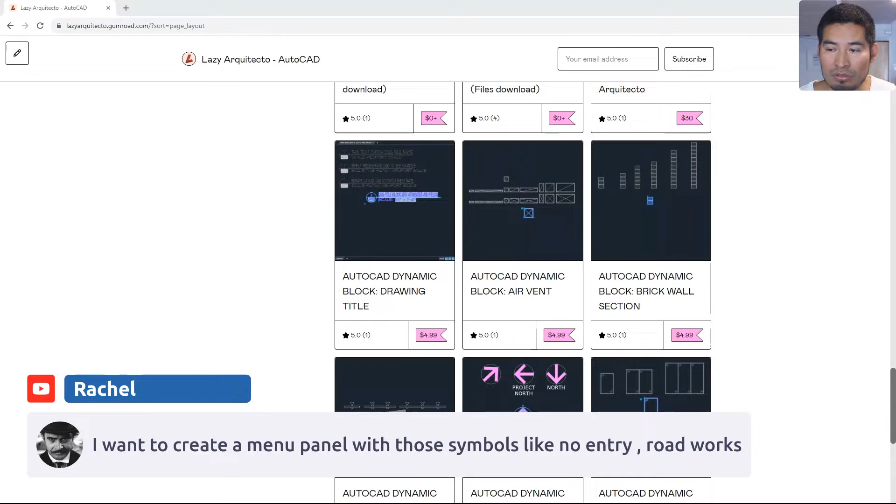All right guys, so we're gonna have our contest right now, and let's see what I want you to answer. Are you ready, guys? Are you ready for the contest? Okay, the question... it has to be a question related to the Lazy Arquitecto. I want you to know me a little better, right? So let's see. Okay, all right, I think I'm ready.

Rachel, so you have 2 kids. Rachel, hold on man, I know you want to win a dynamic block, but you had to wait till I ask you something. You're trying to beat the system here. You're trying to cheat.

All right, so the question is... what, two... Martin says two children. That was the question from our last week's contest, guys, so don't try to cheat here.

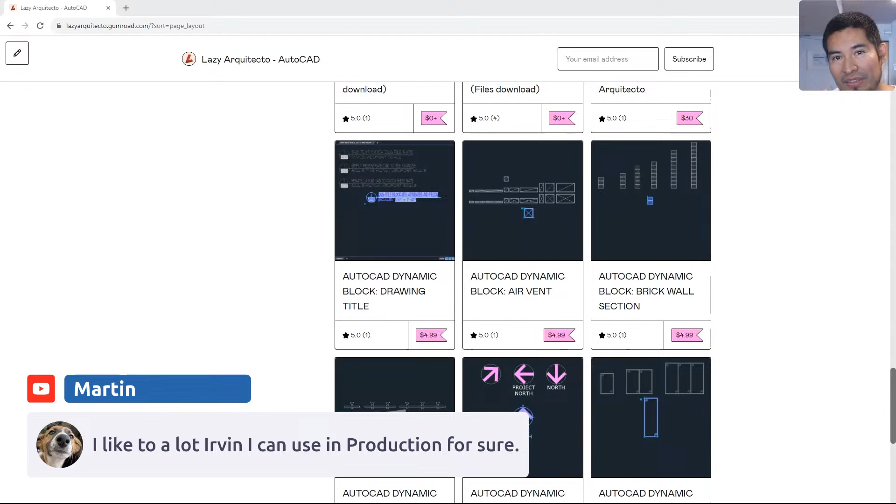And Xiomara says 2023, and that is the correct answer, Xiomara. Congrats, you are the winner of a dynamic block, Xiomara.

So I graduated in May 2023, guys. I did a post. Well, come on, guys, I thought you knew me more. Let's see, where is it? I'm gonna go and show that post.

So for people who don't know, you can know more about the Lazy Arquitecto from the community post right here. You just go to our channel, community post, and we post all kinds of things here — quizzes, tests, everything, even personal stuff. I'm sure there is... here you go, those are my kids, but I'm sure I did post it. Here we go. That's the graduation, guys, or one of the pictures, and many people commented.

I thought you guys would be right here in the comments. Oh, come on, guys, here we go — Xiomara is right here, so that's why Xiomara knows. But Rachel is not here, Martin is not here, that's why you guys didn't know. Anyway, so Xiomara, glad that you win this.

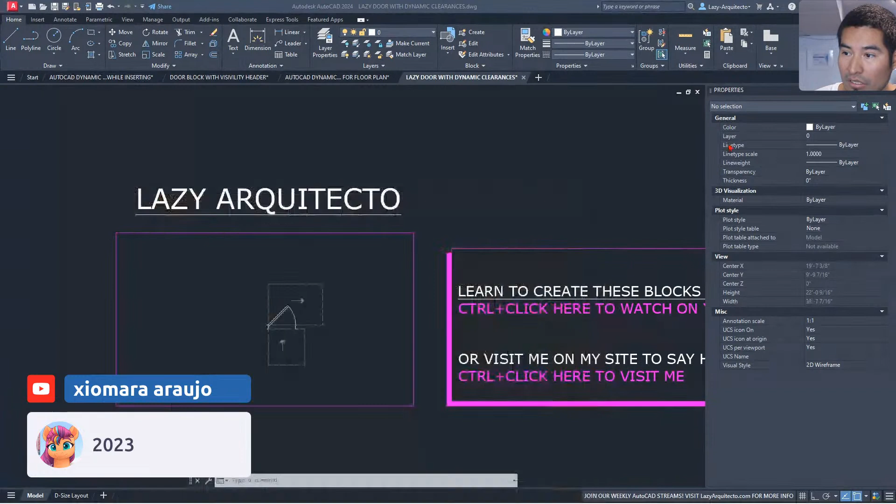In the meantime, let's read a couple of comments before we wrap this up. Rachel says, no wait, that was Independence. Martin says, I like... oh okay. Martin, I know, and we can discuss at the email stage. Xiomara says, thank you, sir.

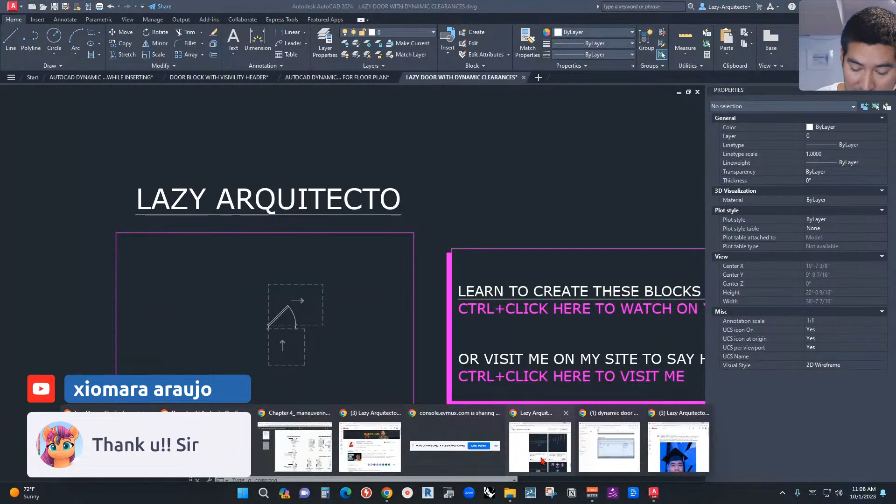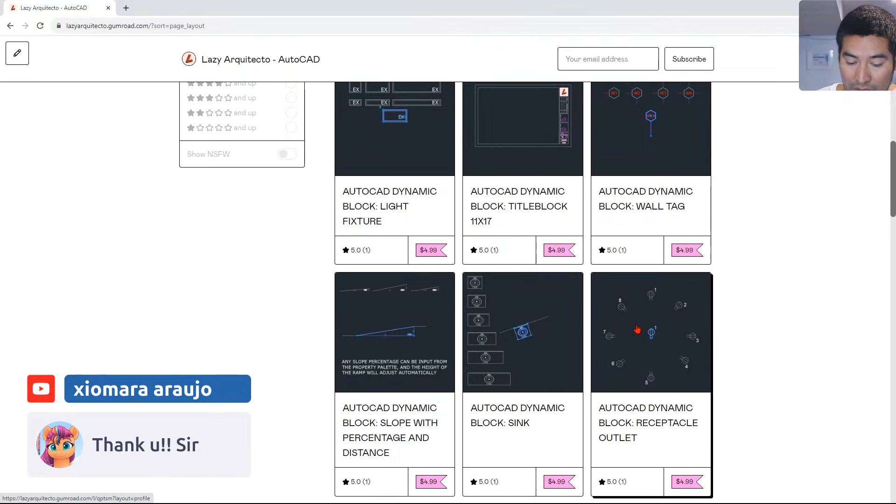Xiomara, let me know if you want this door we just created today, or other blocks from our website. Let's see, we have so many right here: this north arrow, window, lighting, brick, air vent, sofa, break line, two-leaf door, three-sink compartment, the sink, receptacles, slope percentages, dynamic lighting, title block, wall tag, window for plan, dynamic for another door, and so on.

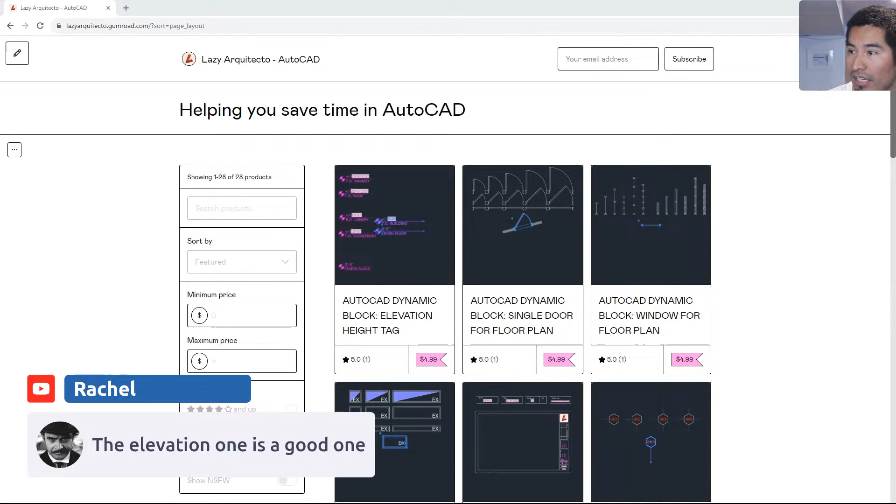Rachel says the elevation one is a good one. Oh yeah, so the window — here we go, that's the window right here. This will equally divide the window, so you don't have to manually use the divide command, draw lines and so on. Guys, come on, you should simplify your lives, that's why you are here right now. Xiomara says window. All right, great, Xiomara, good choice.